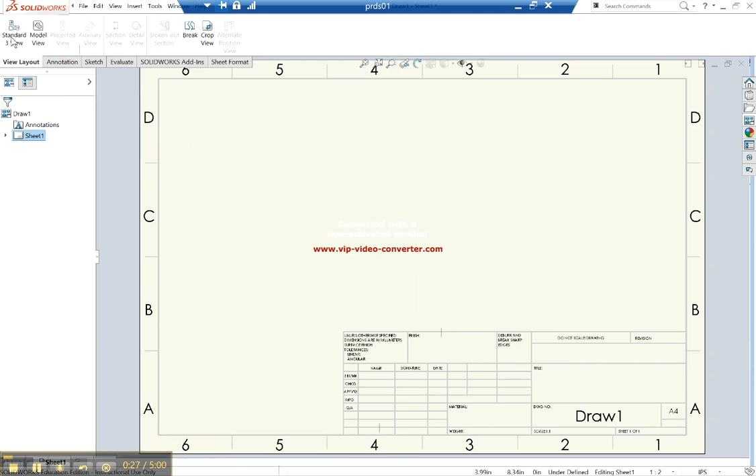Now, this is where, whether you started sketching on the front plane or started sketching on the back plane or anything like that, becomes important. So you can see there, what it's done is it's pulled in an orthographic projection from it. We've got a plan view here, we've got a front view and a side view. And if we had been a bit more correct, this would have been fine for us. We could have used these 3 just straight from that.

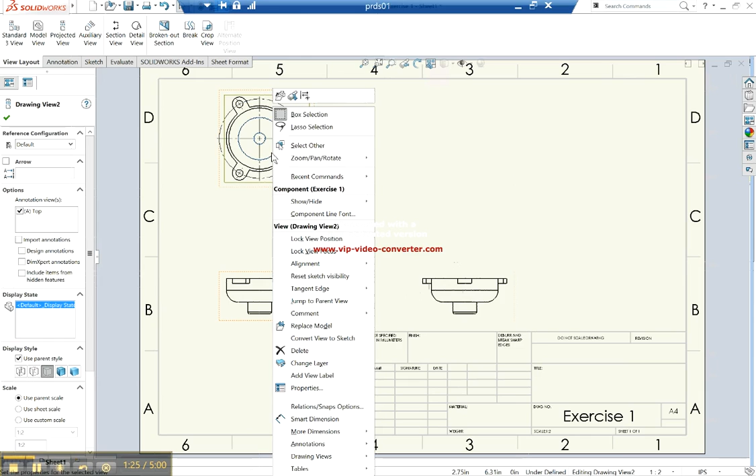Now, ideally, I prefer this to be rotated the other way, and again with this one here. So it's not completely ideal, but it kind of shows you the benefits of needing to set up your drawing correctly from the start. A very quick way to do it, you can right click on this part and we can open the part in position. So this will bring us back into the 3D model, and we can just see how everything was set up.

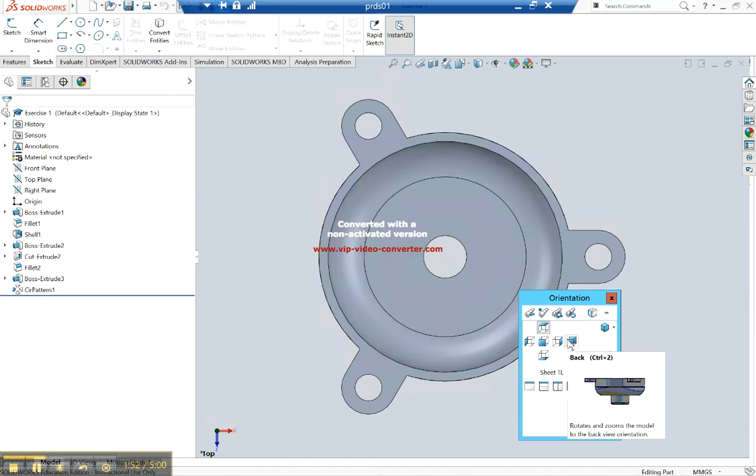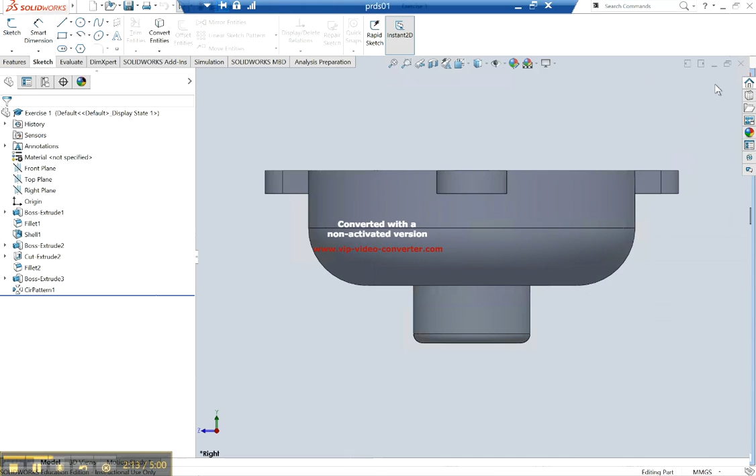So it's taken it from these views. Now our front view was set up like that, so I should have sketched it and extruded it the other direction. That's our plan view, our top view, and then our particular side view is going to be one of these. Now which side view it takes into our other part, it seems to be taking that right hand view. So it really is important what way you set up these views. Now I'll show you how we can get around this.

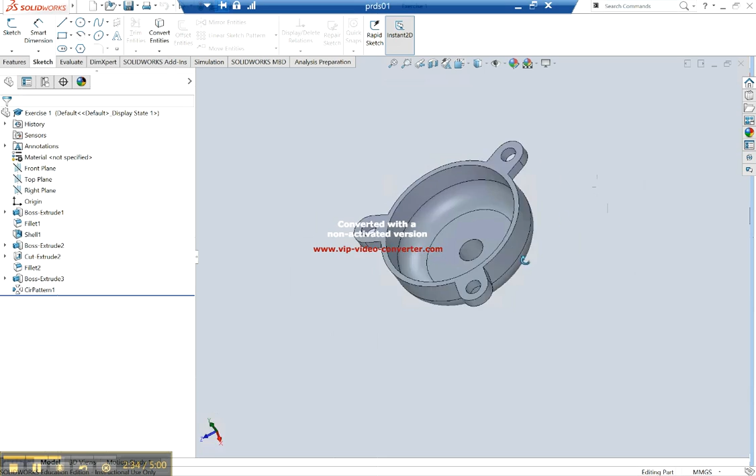But even as well, if I go to our isometric, we're getting that kind of view there, and sometimes maybe you want that because you want to see that shell in there, but really the orientation for the piece should be somewhere along. If I set up the cube, it should be something like that there. Okay, so we go back into our drawing and we'll flick back into it.

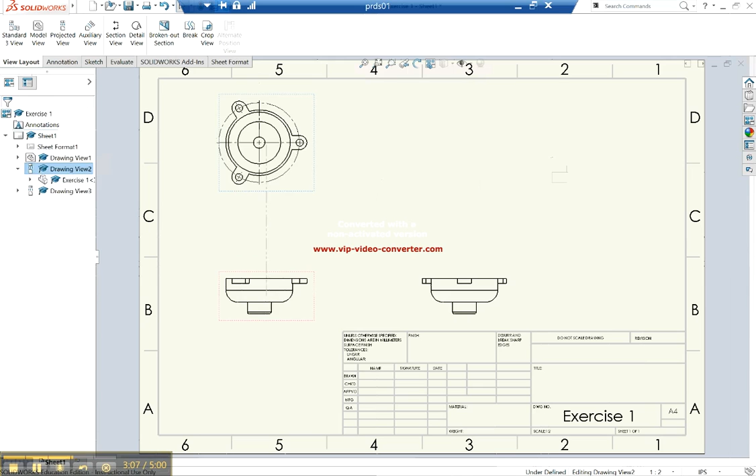You can see, well, that's the way to get the 3 standard views, so ideally they'd be just popped in for you. Also, these views are all linked together. They're all linked to the front view. So if I try and move this around, you'll see I can only go up and down because it's linked to follow this position. So those 3 are all linked from it because these are actually projected views from that that we can produce. Again, we can pick that up in different videos.

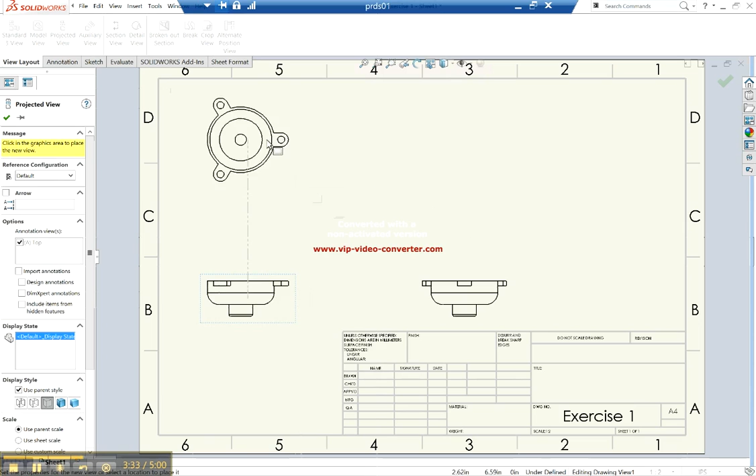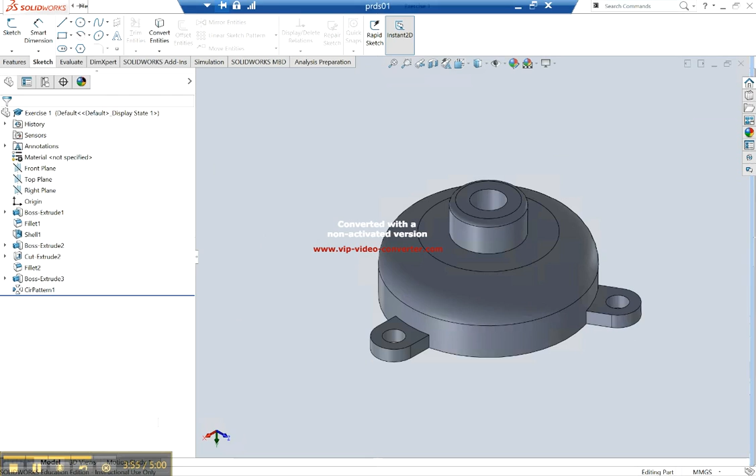So just to show you a couple more things from views, what I'll do is I'll delete some of these. I'll take them out. So just to show you, I can take a projected view from this here. I can pull it out any side of it, and I'll get different views. That's just again coming from that kind of cubed view that we've seen that we can set up in the 3D part. So I can take any of those projections from that cube, so you can pull off in any direction from the cube and take a view from that.

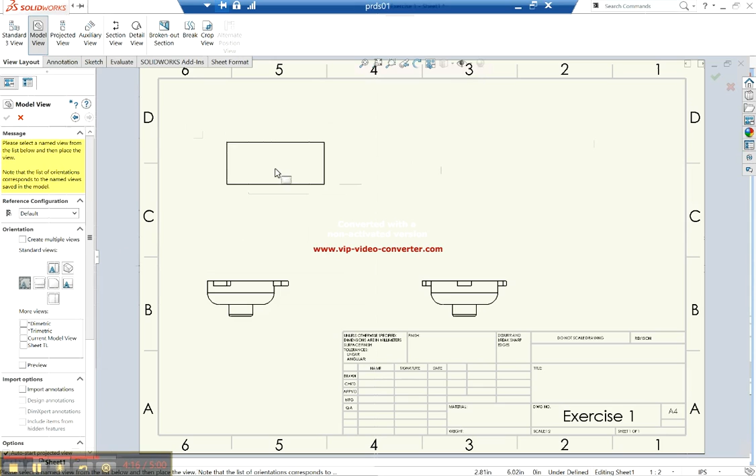Just find my other drawing, there we are. And then if you just want to get a standalone view, you can get a model view. You can take that, you just go next, and you can pick any of the views that you so wish. The only thing is you don't really get a preview of them when you bring them in. But that's a standalone view that you can take. So that's kind of the difference between these 3 here.

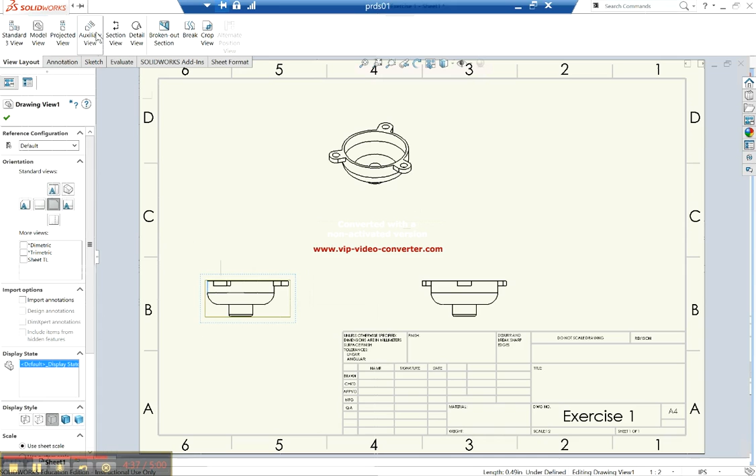And then very quickly, the auxiliary view just takes a reference edge and sets up a view from that. So if I just take that edge there, I can go auxiliary view, and it's as if you are looking in from that side, whichever side it is, and that's the view you get. So you can take some of them. Again, auxiliary view, just selecting any kind of reference edge, and you can take it from that there.